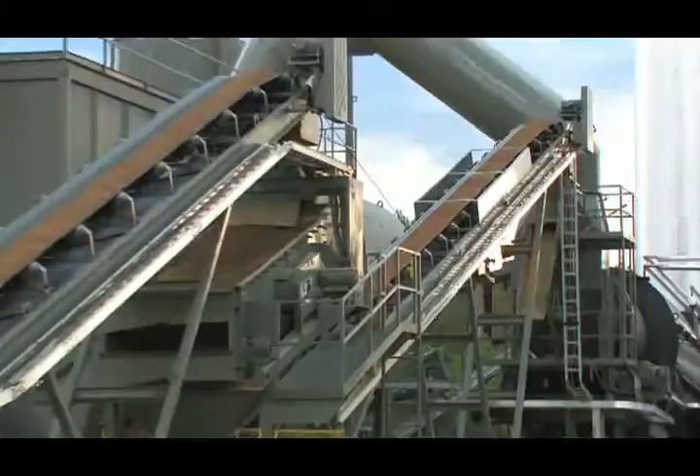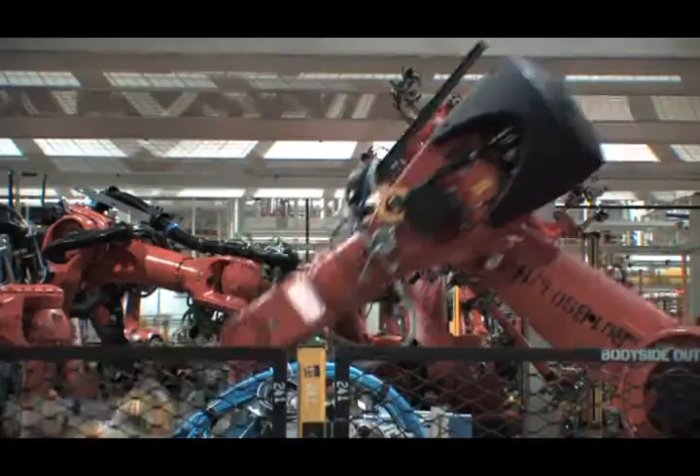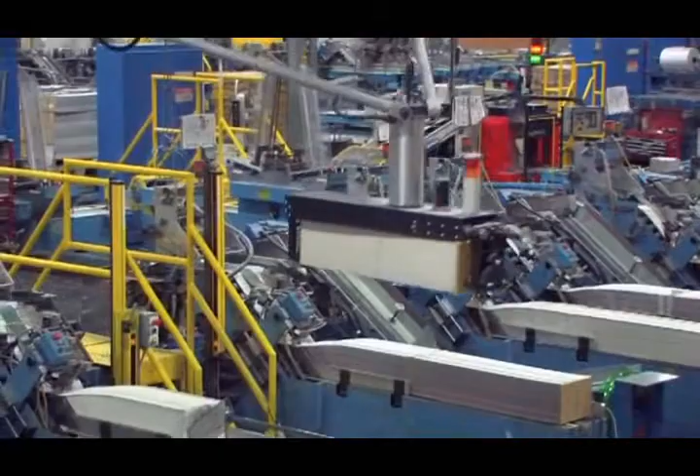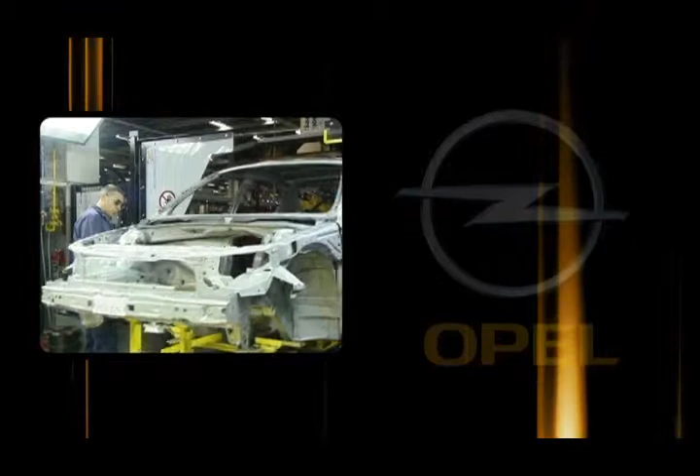Astec Industries, a company moving America from rock to road, building and restoring America's transportation infrastructure. It's an engaging view: robots working at lightning speed to frame the Jeep Wrangler on a production line that is unmatched for speed and safety innovation. This is KUKA, a smart machine from CAMotion that uses motion control to precisely pick up and lower loads. But what's even more surprising is what happens when people and the robot try to occupy the same work location. Every year, about 260,000 Opels come off the line at this facility in Belgium, headed for over 100 destinations worldwide. Astec, KUKA, CAMotion, Opel - they make safety a priority, and in the process are uncovering the competitive advantage.

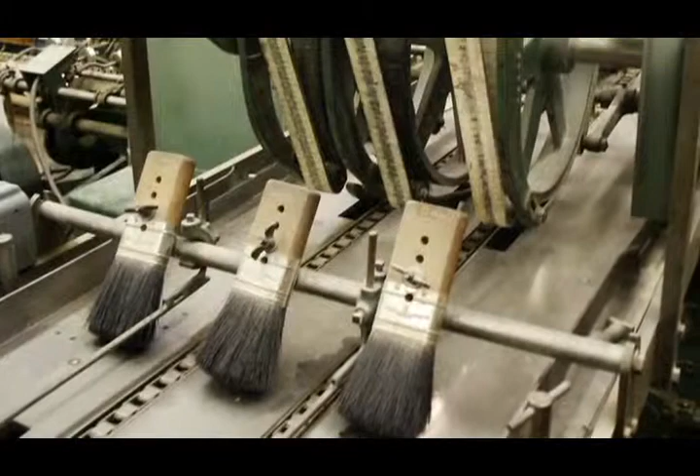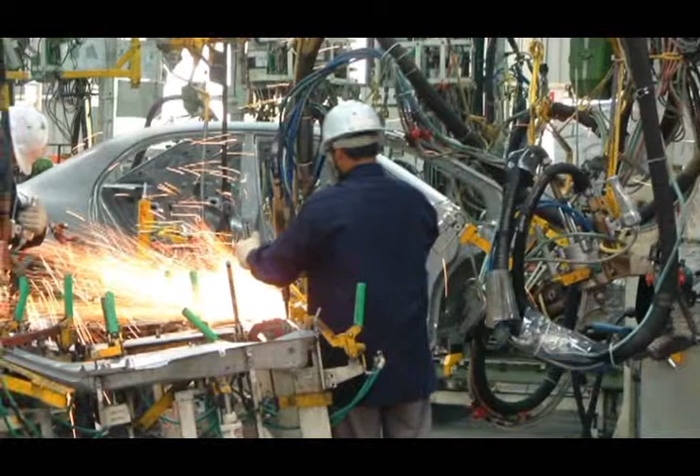It began some 30 years ago. Machine builders in Europe and North America experienced a huge paradigm shift with the advent of PLC technology. It changed forever the way that engineers designed and wired machines. But at the outset, the technology wasn't always reliable. So regulators on both sides of the ocean excluded PLCs from playing a role in the design and implementation of machine safeguarding systems.

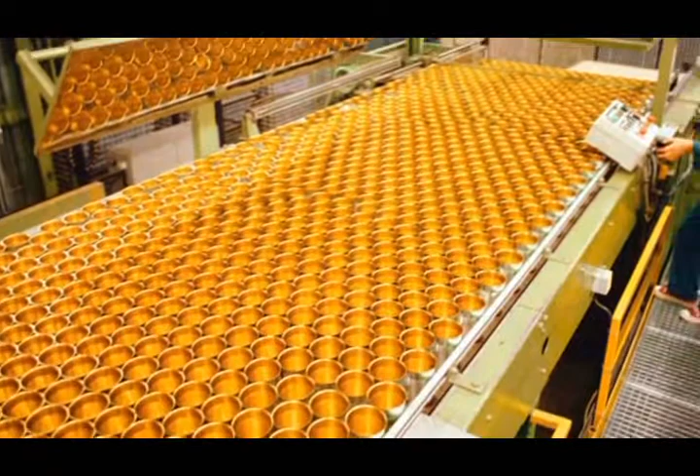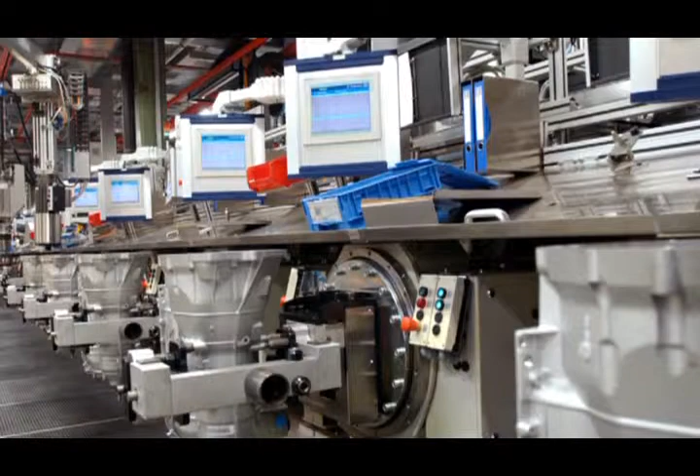In the 1970s, when PLCs came to market, it very quickly created two layers in the architecture of a machine: the automation architecture, where a PLC would control the machine, and a separate layer of technology to do the safety and machine guarding for operator safety. But there were no consistent standards in place for machine design safety, so it was not surprising that injuries increased. In response, workers' compensation groups from around the world began a movement calling for regulations to protect workers.

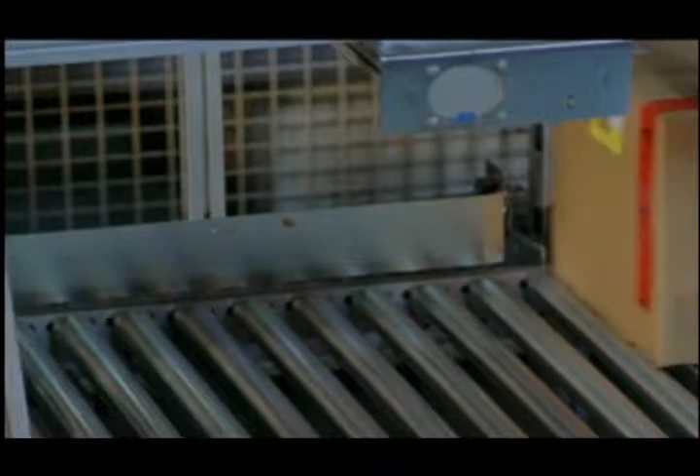Europe was the first to respond. In Europe, we have the European directives which cover the application areas of safety-related fields, maybe for example the machinery directive. But the European directives do not give any detailed measure or guideline how to fulfill the requirements, and this is done or described in European standards.

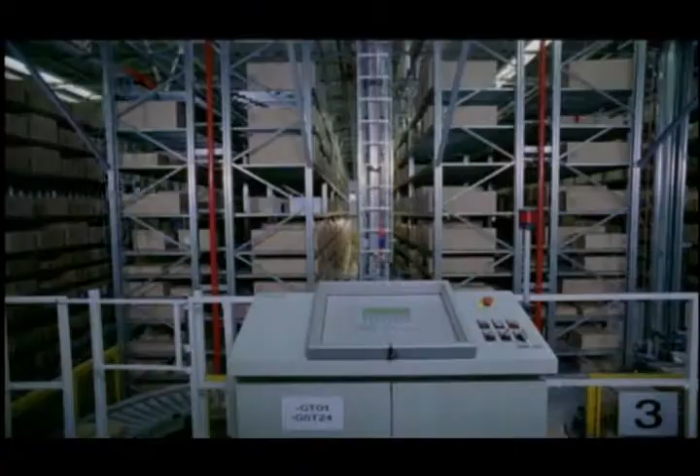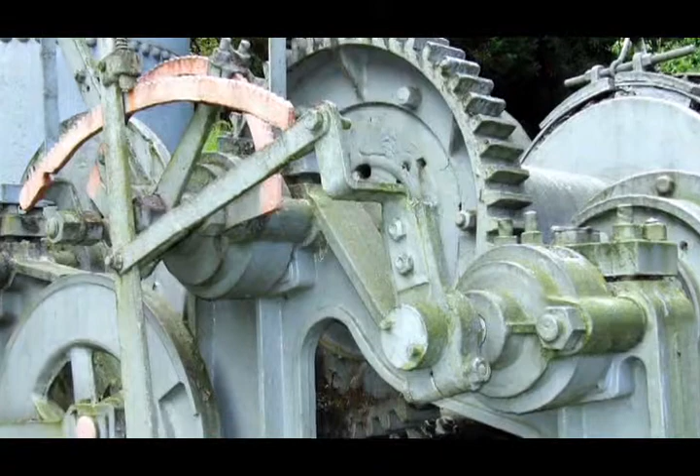While safety in Europe was mandated and legislated, in the U.S. it continued to be viewed as something that needed to be done to comply with OSHA - a cost burden, a deterrent to productivity. In the 80s and 90s, this rampant technology continued to explode at a very fast pace. However, the safety layer continued isolated in its own environment, and the results were that many customers were forced to choose between productivity or safety. Those that chose safety experienced a lot of intermittent downtimes with the machines, which had a negative impact on productivity.

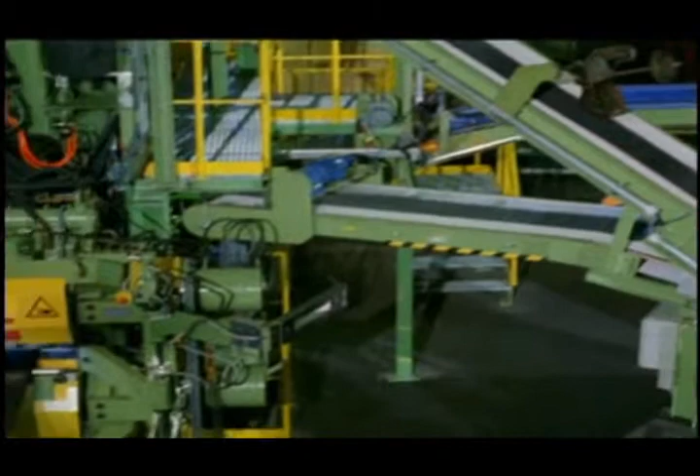Over the years, local standards emerged in different countries addressing safety and machine design, but the standards varied widely. All of that was about to change.

In the mid-1990s, spurred by shrinking trade barriers and improved technologies, the time was right for globalization and harmonization. Europe led the way. The international standards, the IEC standard, especially the general standard IEC 61508, was a basic standard for the design, development of safety-related programmable systems. This standard was developed in international working groups.

What really happens in today's world is that compliance with regulation in any country is a given. And the higher level that you now strive for, on getting common globally, is conformance to harmonized standards that with risk assessment will give you what top management is asking for.

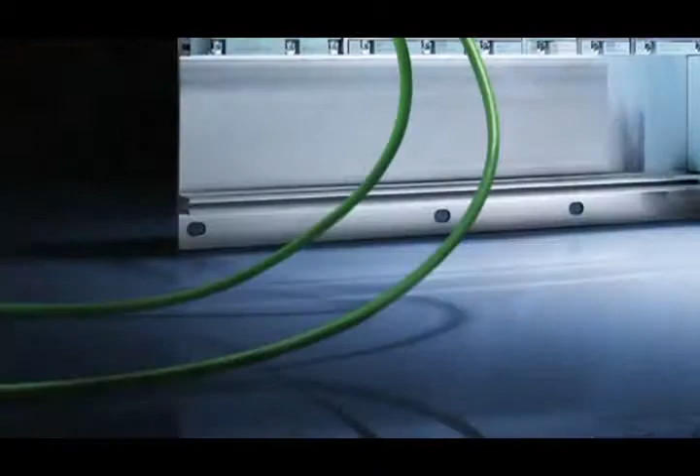In this changing world, technology often surpasses the standards. But more recently, standards are responding with rapid change as well. Here in the United States, the safety landscape began to change as early as 1999 with the standard for robots, RIA 15.06. One of the most significant things was the risk analysis requirement that came out of that updated standard.

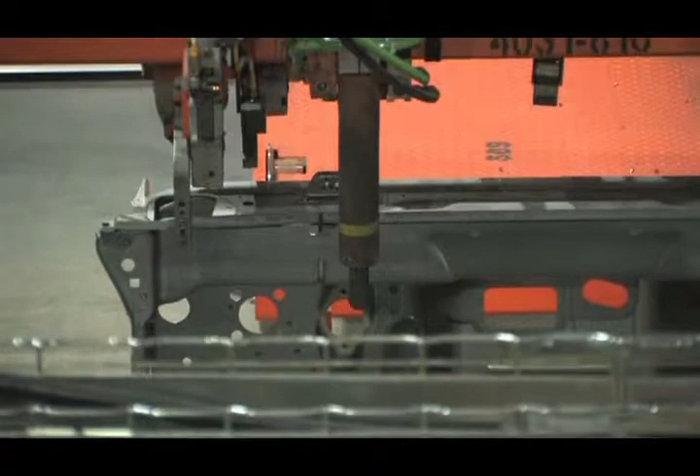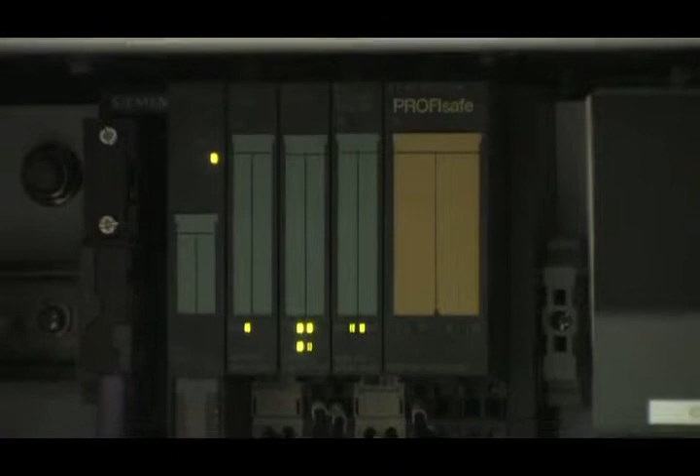The second major change was NFPA 79 in 2002. Still somewhat unknown, this standard signals a major change for OEMs and end users. In the past, the standards precluded use of automation, and safety had to be hardwired. But in 2002, NFPA 79 safety standards were rewritten to be simpler. As a result, companies are moving from hardwired dedicated safety to the Integrated Safety PLC.

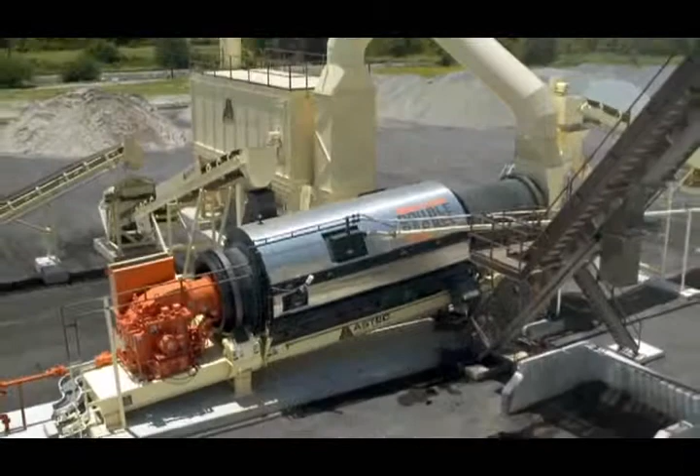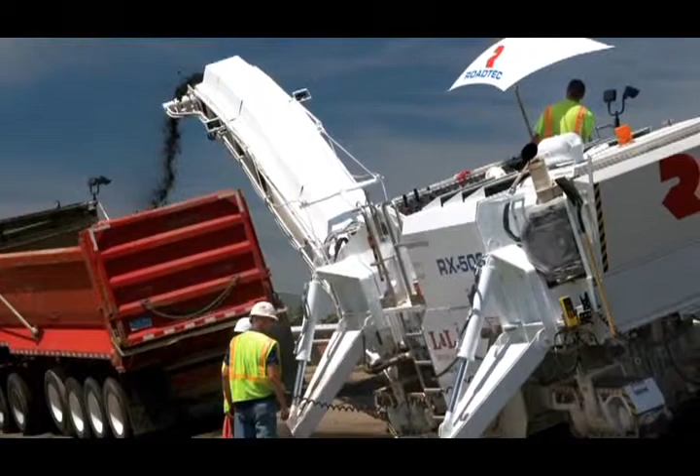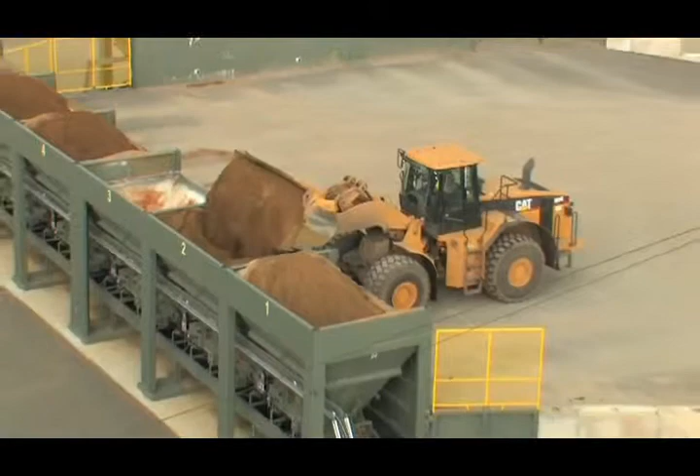Astec Industries, based in Chattanooga, Tennessee, moves America from rock to road, building and restoring America's transportation infrastructure. For the Asphalt Group, times are especially demanding. Roads throughout America are crumbling because of years of inadequate maintenance. At the same time, asphalt roads have been proven cost-effective to construct and maintain, and durable. So it's no surprise that demand for new products, both here and around the world, has skyrocketed. The group manufactures portable, relocatable, and stationary asphalt plants, applying creative thinking to a traditionally low-tech industry.

Mark Harnett of Astec noticed a trend: the CE came over from Europe, and all of a sudden we were faced with directives that we didn't understand. They were very gray, very bold, and the big part of all of it was really documentation. All of a sudden you had to have a formal technical file that described the hazards and how you're going to protect people from it, and go into 10 times the level of depth that we ever had to do before.

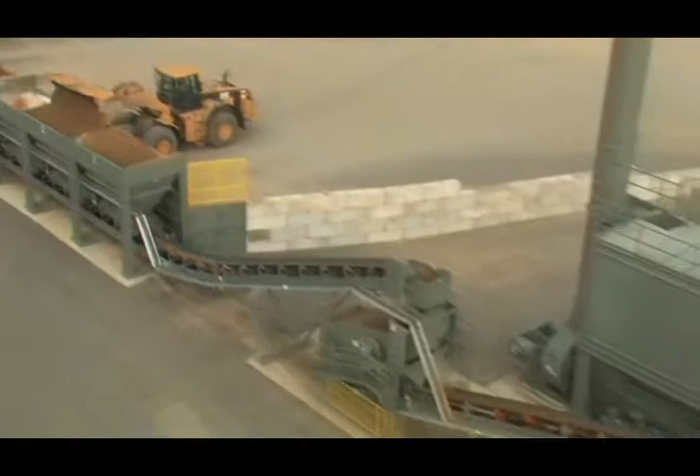The machines which Astec builds require a high level of safety. After all, the hazards are significant: burns, crushing, pinch points, electrical shock, just to name a few. Up until 2 years ago, all the safety required for these complex asphalt operations translated to complex wiring from station to station, and operators had limited or no feedback from the safety relays. Astec saw that simplification of the entire system would increase both safety and overall performance of their products.

The first thing we got into was doing distributed process control. That was coming out with components that were shipped here from the U.S. They were pre-wired, and basically we could test as components. And we did it through Profibus. And the next thing that followed very quickly was ProfiSafe, which meant we could start to integrate safety right into the same structure and put it into the reporting of the system and make it a whole lot easier to troubleshoot than having the old hardwire system that we used to supply before.

By integrating safety, Astec has realized some significant benefits, including cost-effective compliance, faster setup and commissioning, and extensive diagnostics. What it really means is that we've opened up doors for our business in other countries, because if you go through and you look at like Australia, they're very, very similar to CE. It's almost a match.

Japan is probably a little bit tougher even, but all the European countries and even some of the Central American countries now are conforming to using the European model as a role, and it just makes it a whole lot easier when you go in there and you can say, hey, I've got the most sophisticated control system and integrate safety and everything else with it.

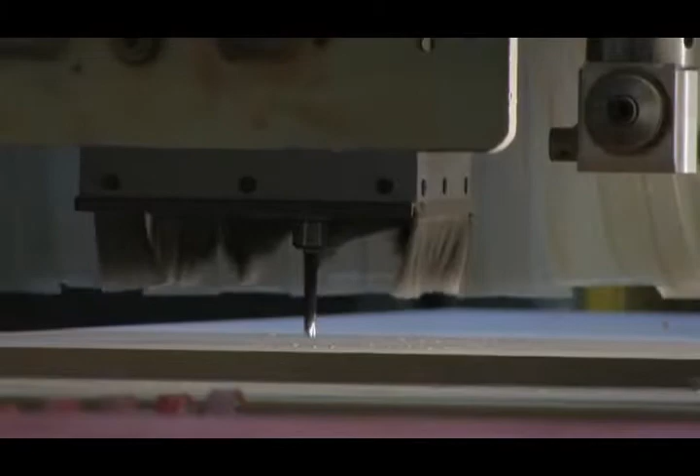To be competitive, companies need to understand regulations and standards. But there are so many that it's confusing. Here's what you need to know about a few key ones to get a clearer picture of what must be done. First, at the most basic level, any machine that creates a hazard must be safeguarded to protect the operator and other employees.

NFPA 79/2007 has just been approved and was published for distribution in October 2006. A new edition eliminates the requirement for a separate control element for the final removal of power when using a safety-certified drive. The ANSI B11 series of machine tool safety standards is another important set of standards. In fact, OSHA can assess violations referencing these and other consensus standards. Some of the most important documents coming out are not the specific standards, but the new collaborative technical reports.

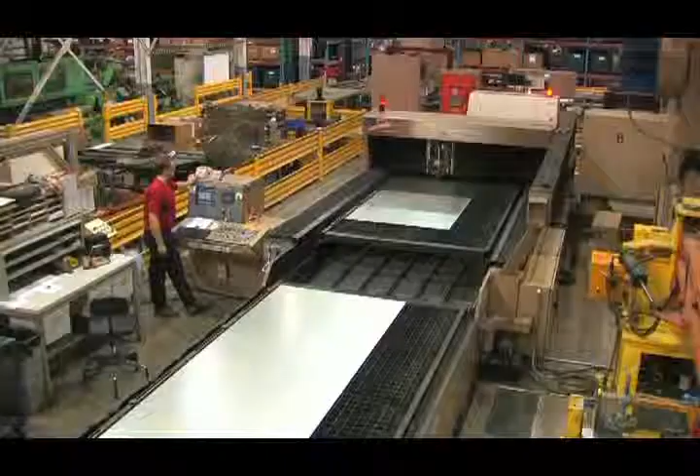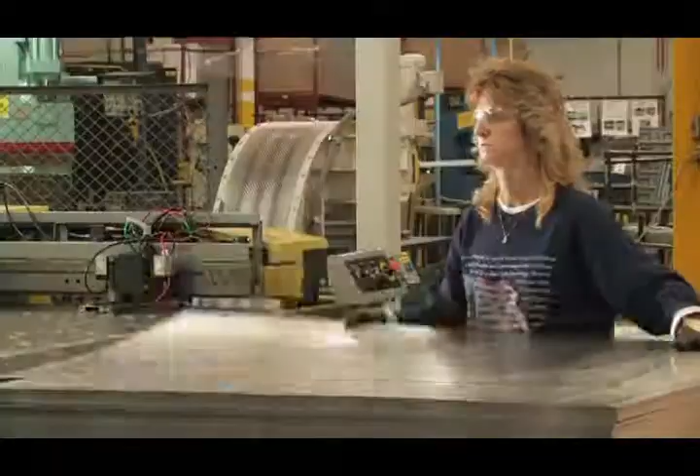ANSI Technical Report 3 is the foundation for task-based risk assessment that infuses itself through the entire family of standards. The new report being worked on for the integration of safe and lean is really a seminal work. While the standards have often been viewed as the domain of those in the health and safety area, that's changing. Today, management at all levels should know about a standard titled Occupational Health and Safety Management Systems.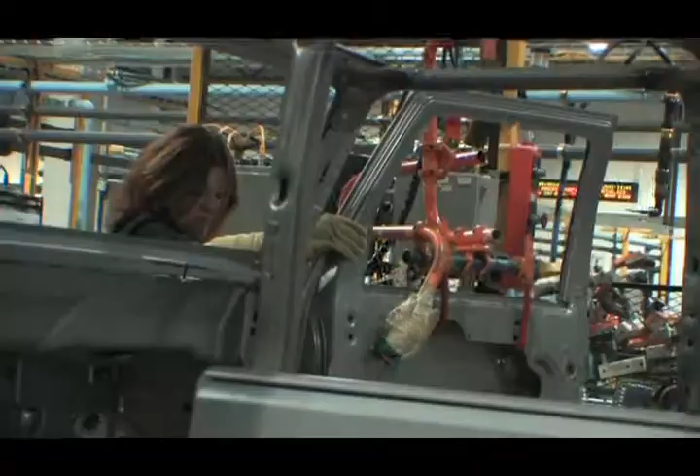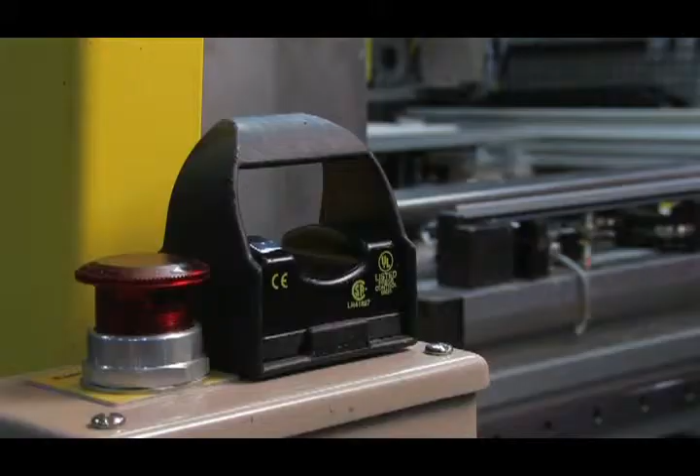Approved in July 2005, ANSI AIHA Z10 is the first time in the U.S. that there's been a national consensus standard that applies to organizations of all sizes and types. Z10 provides the methodology and framework to integrate occupational health and safety into an existing management system. And the implications will be far-reaching.

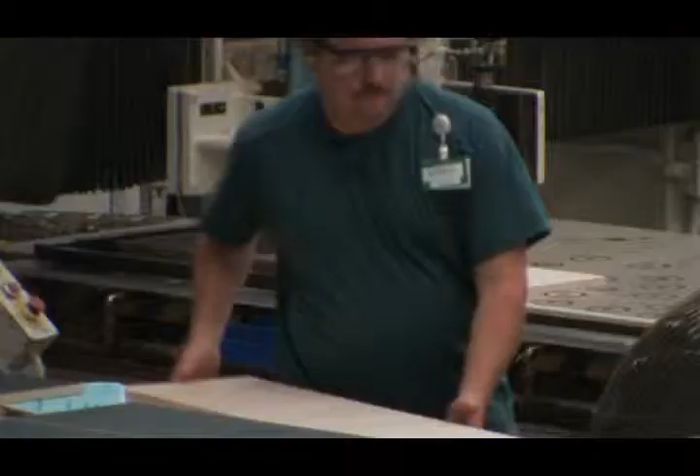If we want leaders to lead safety, then we have to put things in a language that they use on a daily basis. Z10 will help people better align what they do into the fundamental core business of any organization, because it creates a foundation for safety through design.

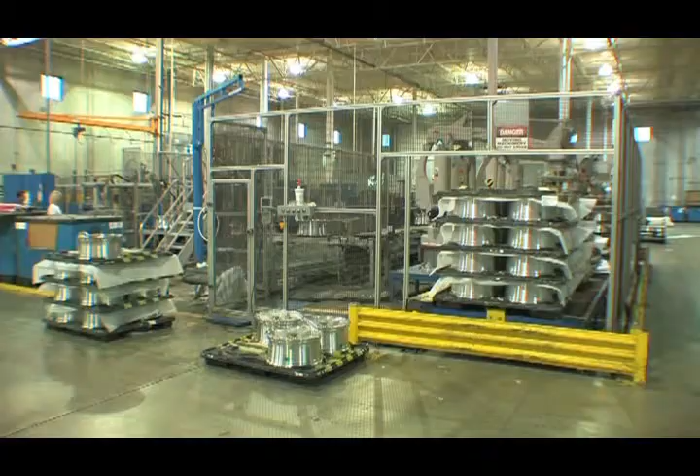What's becoming obvious to many is that standards are about more than just compliance with OSHA and avoidance of fines. Standards are about doing the right thing for the health and safety of individuals, and at the same time uncovering the competitive advantage. What industry is going to see is a flood of standards that are all in rewrite status right now.

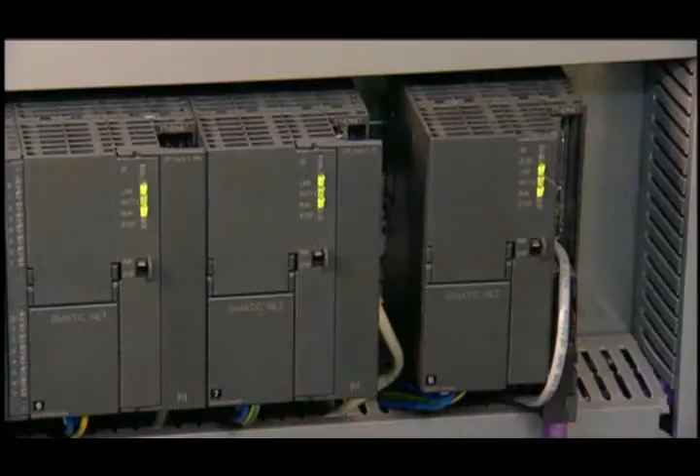Some have just completed their updates. All of the standards are now acknowledging these new options and these new technologies with regard to fresh and new ways to think about providing operator safety on machinery.

Risk. It's all around us, every day. We all know that there's no situation that is risk-free. So when do we accept risk? And how much risk is acceptable? Risk is acceptable under three circumstances: when it's insignificantly low, when we're sure it's worth it, and when we do not know it's there. And that's the whole point of the risk assessment.

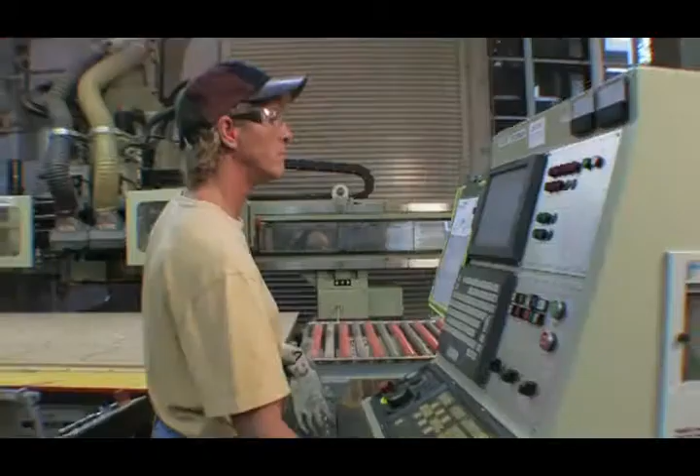People are drawn to risk assessment for very different reasons. Whatever the driver, one thing is becoming more and more obvious. Risk assessment works, and it takes work. Risk assessment is really a journey. It's not an event. It's not something that you do once and you're done.

It takes time, interrupts people, two to three days on a typical machine. But after that, it gets easier and easier each time you do it.

Today, we tend to do a lot of safety work after we release the product, after we release the system. And tomorrow, what we want to get to in safety through design is getting us to the point where we're doing safety up in the design phase.

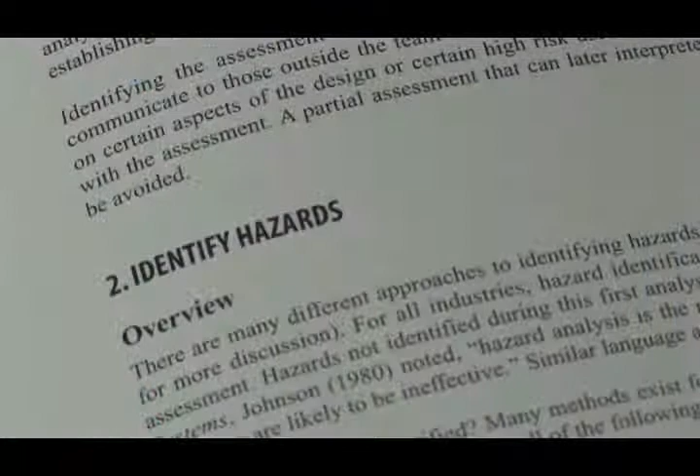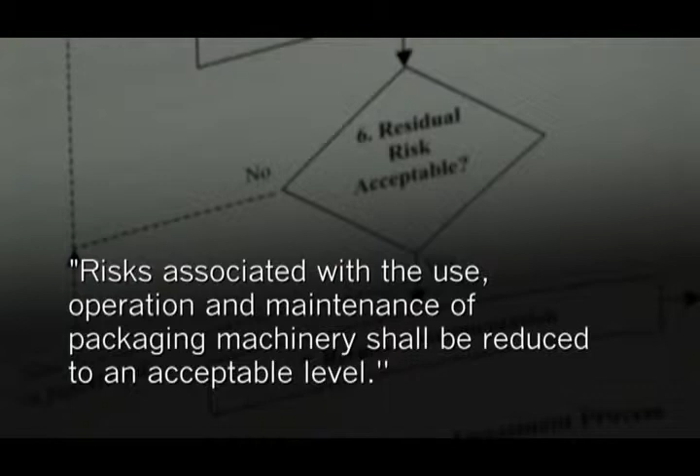There are a number of different methods and tools available to do risk assessment, but generally the process is to identify the hazards, assess the risk, reduce the risk, and then document the results. For example, the new packaging standard that applies to both end users and suppliers of packaging machinery does not require that the level of risk is zero. It requires that risk is reduced to an acceptable level. Of course, what's acceptable is somewhat subjective, and that means you need to get comfortable with the subjectivity.

In the area of machine safety, many start with the hazards of the actual machine. But Bruce Main, author of Risk Assessment, Basics and Benchmarks, discusses a slightly different and fresher approach. One of the newer aspects of risk assessment is the task-based approach. Task-based is really where you dig down and understand what people are doing with your systems, your machinery, your designs. And it's by doing task-based that you can really identify hazards that you don't otherwise see and then reduce risks associated with those. That's where you need to focus your efforts.

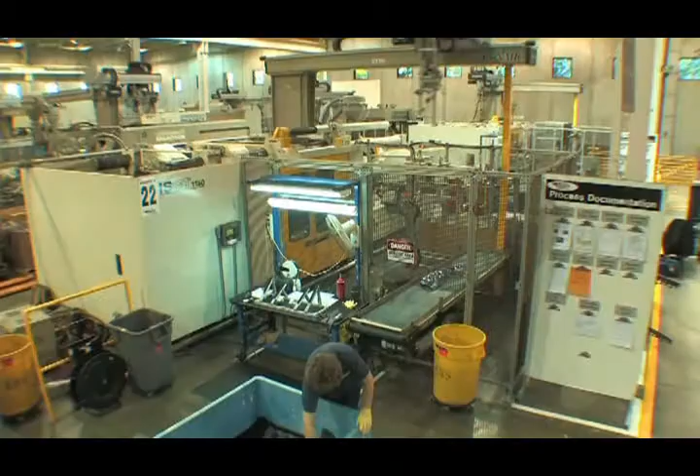Don't get hung up making it a scientific exercise. It isn't. New tools like this software guide you through the risk assessment process. It's not an expert system. It doesn't tell you what to think, but it guides you on what to think about.

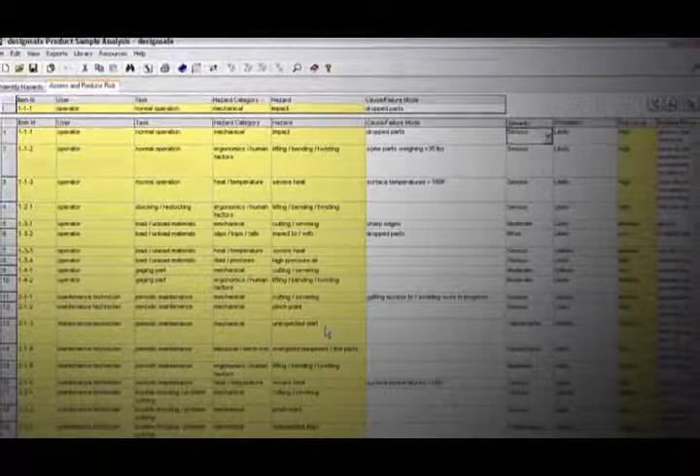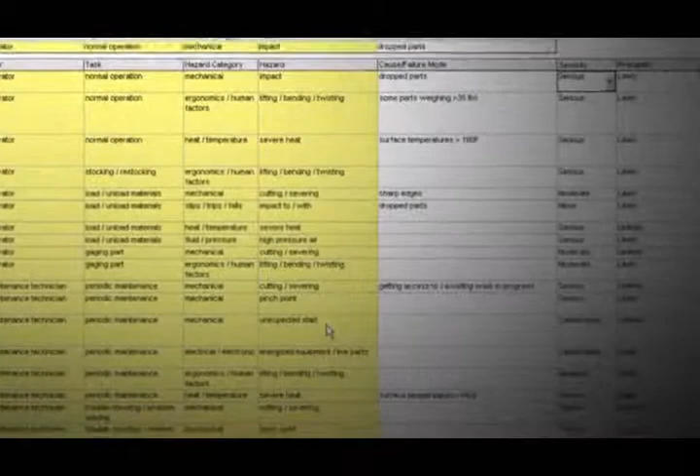So it helps you to identify users, a list of users that might be involved in your activity and the tasks that they are performing. The next level, you look at hazards, and you're able to identify then hazards associated with the tasks. Now, what you get from this is a documented risk assessment that's required in the different technical standards and reports.

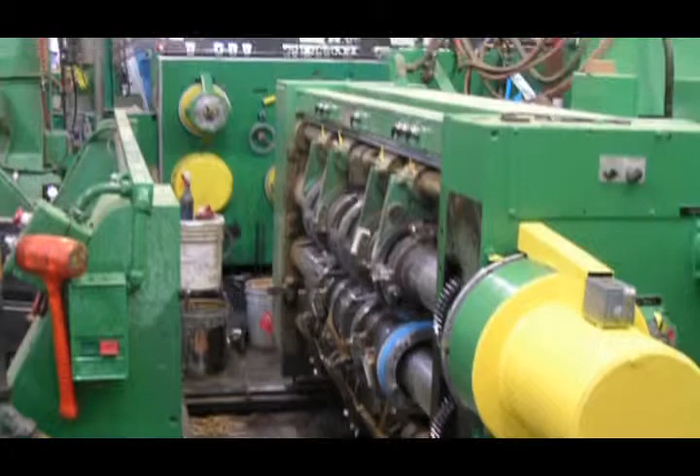Sometimes hazards are designed into machines or systems. That's because the tasks are not anticipated. This occurs on both older and newer machines. In all the years I've been doing safety and working as an engineer, I've never seen a circumstance where an engineer identified a hazard and didn't handle it.